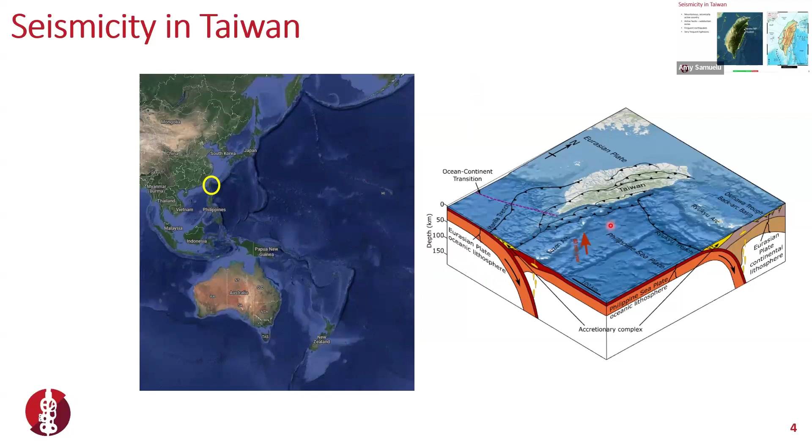It's a reasonably small country, a small island about a third the size of the North Island, with about 23.5 million people living there, mostly in the north and on the western side of the island. As you can see from this satellite image, it's actually a very mountainous country. A third of the island is lower than 1,000 meters elevation, the rest is above, because of that high seismicity and active plate boundary running right up underneath and through the country.

Just for reference, the plate motion is roughly 80 millimeters a year, the convergence, which is approximately double the Alpine Fault and about 30% more than the Hikurangi subduction margin off East Cape. So put that into some context.

So as you'd expect, there are frequent earthquakes, and because of the high uplift and mountainous terrain, and its position right on the tropics - the Tropic of Cancer runs roughly through the middle of the country - there are lots of typhoons too, even more, roughly 4 a year.

So the earthquake that we went to reconnoiter this year occurred just off the city of Hualien on the east coast, and it also affected Taroko National Park just to the north.

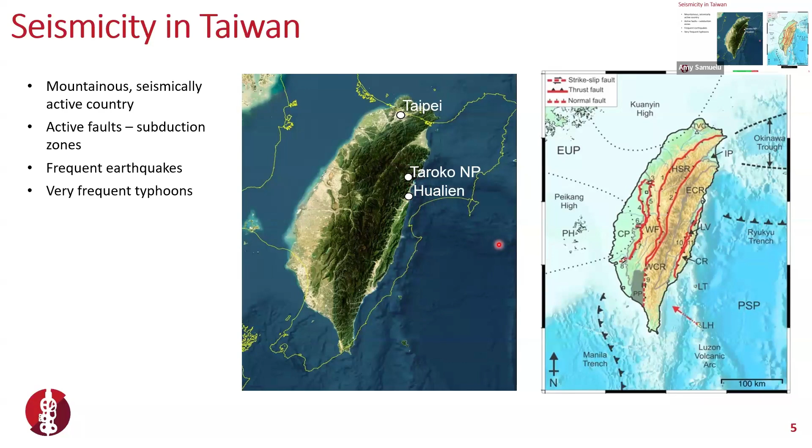There'll be a few themes that come through in this presentation, and one of them is the iterative learning from past events that Taiwan as a country, and all the various departments and organizations, go through. So it's worth mentioning a few significant events that have really shaped the systems and built environment we observed while we were there, and what got them to where they are.

The Chi-Chi earthquake in 1999 was really a watershed moment for things like seismic codes, emergency response, and insurance. Taiwan set up an equivalent to the Natural Hazards Commission in response to the Chi-Chi earthquake, and emergency warning systems and different agencies got established. Because it was such a major event, a lot of buildings got destroyed, with huge casualties and economic losses.

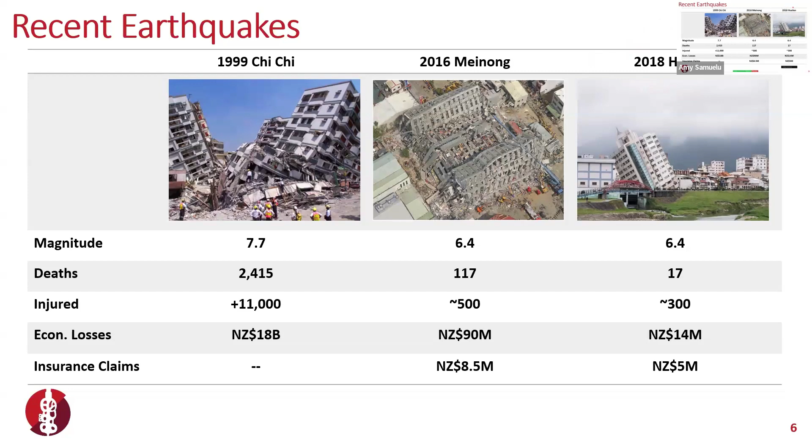Then in 2016, the Meinong earthquake - not as seminal as the Chi-Chi earthquake, but worth mentioning - caused a lot of building damage, and was also the topic of an Earthquake Society mission that Boya led back then. More recently, an earthquake affecting Hualien was useful for our structural engineering team members, because it caused a lot of damage, but also because it was relatively recent, allowing us to compare the damage that occurred then with the damage that occurred this year and see what worked, what didn't, and what the patterns of performance were.

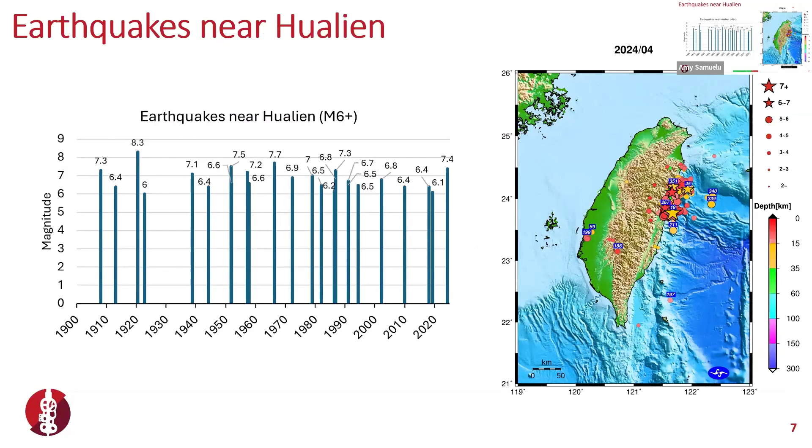This slide really drives home the message that natural hazards and earthquake hazards are a daily fact of life in Hualien. This graph shows the number of large magnitude earthquakes, greater than 6, that have occurred near Hualien - that's 25 earthquakes over magnitude 6 in the last 110 years. So that return period is a lot more frequent than what we've experienced here.

Honing in a bit more on the area, it's quite similar, with a lot of analogues to the west coast of the South Island. You have the central range being uplifted to over 3,000 meters elevation, and then there's a narrow strip along the coast. This is Taipei off to the right, so this is looking southwest, and Hualien is on the east coast here. There's a narrow strip formed from outwash of rivers - gravel from the mountains.

Because of this topography, the infrastructure is constrained. There's only one main infrastructure corridor, with the main road and rail corridors and power networks running north-south along the coast. Then there's the central cross-island highway running through Taroko Gorge, through the national park, and up and over the main range, connecting the east and west coasts.

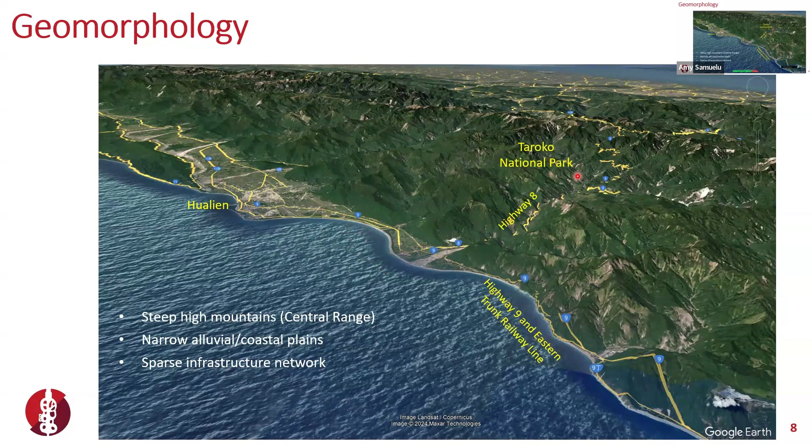A little bit about the geology, as you might expect: the mountains are underlain by hard, strong metamorphic rocks - schist, gneiss, and marble. In fact, the marble along here is quite famous, with a lot of quarries, and it's exported all over the world. Along the coastal strip, it's reasonably dense alluvium with high energy rivers, given all the high mountains and frequent storms - so it's alluvial sands and gravels and beach deposits as you get close to the coast.

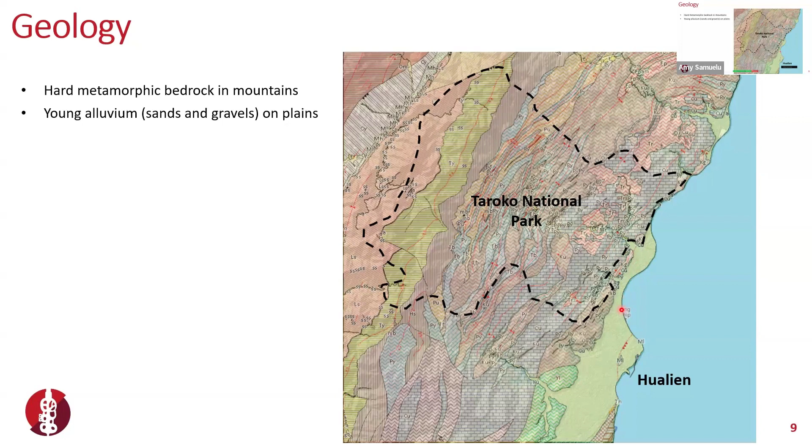In terms of what we actually did, we were based in Hualien for most of the time, and there we carried out inspections. But also quite importantly, we had a series of meetings with local organizations - local government and non-government organizations, building owners, etc. - focusing mostly on the city, but we also took a trip up to the coastal mountains.

We couldn't get into the national park, so a lot of what I'll talk about in terms of damage there is gained from information provided to us and from research afterwards. We also had a bit of time in Taipei, where we had more meetings and workshops with government agencies and institutes, as well as some inspections of buildings that were damaged up there.

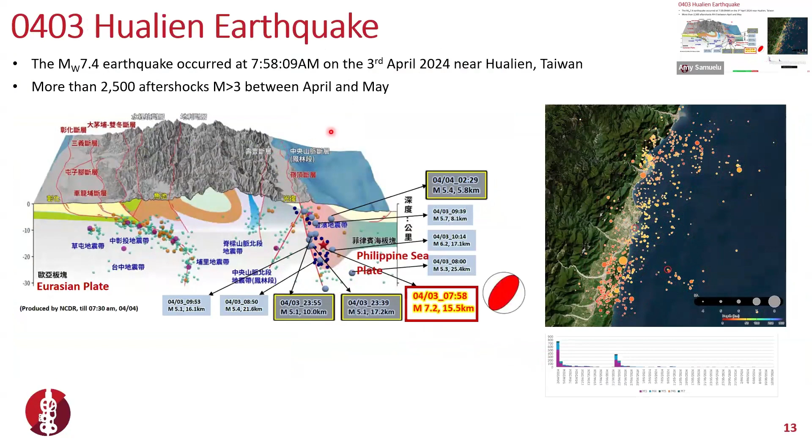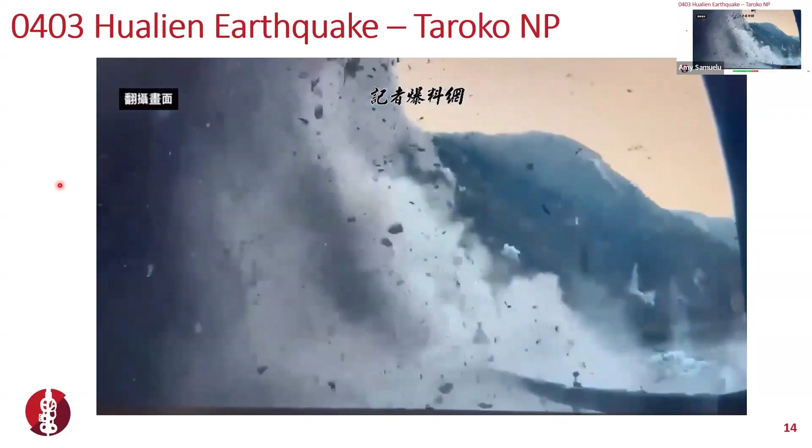So they hear the alert and they stop on the rockfall shelter. Okay, and then you can imagine the rest.

In terms of the ground shaking, there weren't too many instruments actually in the park itself, and you probably can't see those graphs in too much detail, but suffice to say, you can tell from the spectra here that there were very high accelerations at low periods. The PGA up on the main range was about 1.5 G horizontal, and over 0.6 G vertical as well. There's also very high vertical shaking, shown by this blue line here near the coast.

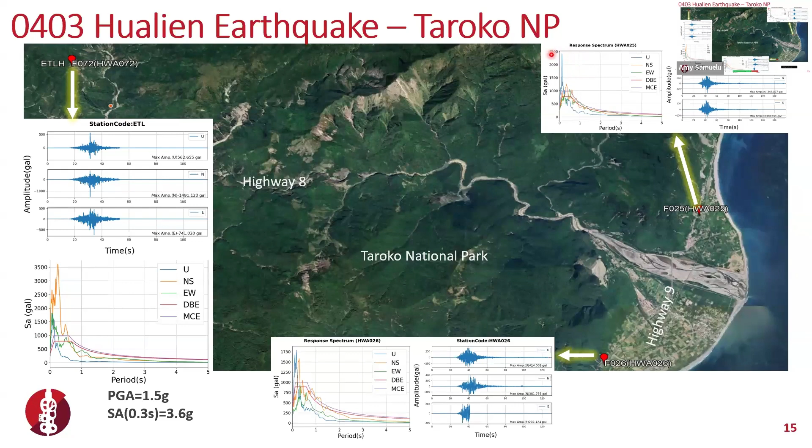And as you might expect, that resulted in a lot of landslides. This just shows the general distribution. A reasonably focused area of landsliding highlights that directivity of the ground motions from the rupture to the southeast, and really concentrated around the coastal part of the main range.

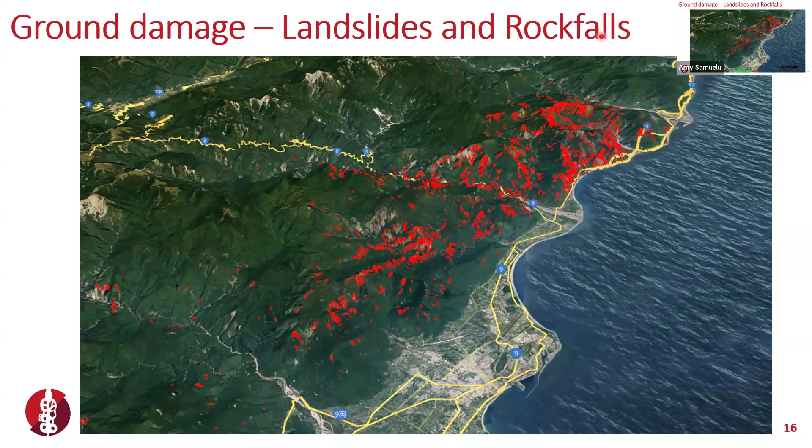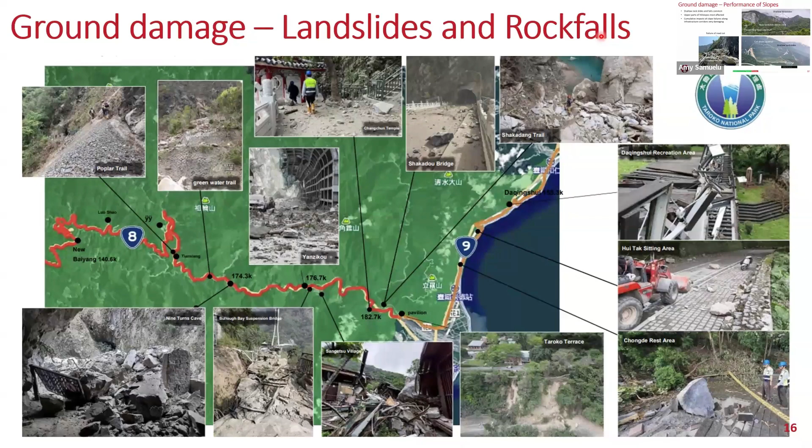In terms of the damage that it caused, well, you just saw that from the video. The landslides all tend to be higher up on the mountains, and then they resulted in rockfall and rock avalanches, so impact damage was the main form of damage. The rock slides and rock falls from the upper parts of the hill slopes tended to be the most common type of ground damage - maybe not so large individually, but because of the number of them and the cumulative effect of lots of them occurring along a narrow corridor, the impacts were quite significant.

So just a bit of context about slope hazards in Taiwan and how those are managed. As I mentioned before, Taiwan has 4 typhoons a year on average, and because of the mountainous terrain and the communities that live in the mountains, hazard management is a really critical part of life. So the underlying principle here is that we can't stop landslides and debris flows from happening. We need to mitigate the risks, manage the land use, and provide alerts and warnings to people who are already in those affected areas or potentially affected areas.

The Agency of Rural Development and Soil and Water Conservation is responsible for managing the early warning system. They've mapped out all the debris flow catchments, and the Central Weather Administration provides weather forecasts to the Soil and Water Conservation Agency. If it's over a certain threshold, they issue alerts to the local government, the equivalent of the council, who are then responsible for evacuations and providing shelter.

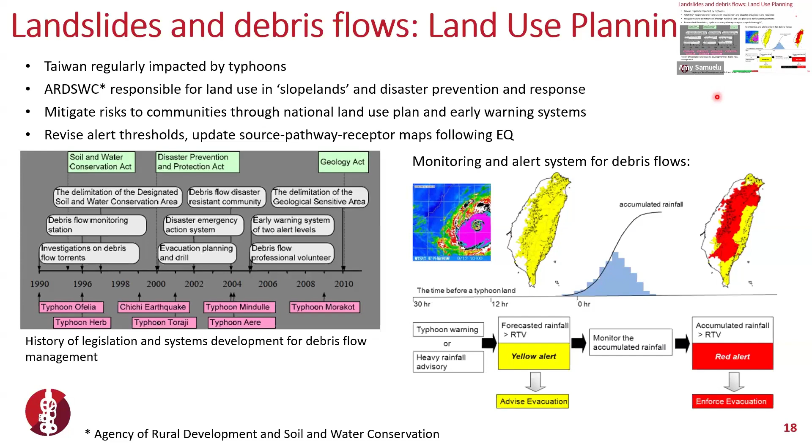After the earthquake, all of these got remapped and reassessed, and new sources of debris flows or landslides were picked up, as well as the receptors, and these got added to the system. So for buildings within a potential debris flow path, they would be on the register, and when alerts were triggered, the county government would be responsible for ensuring evacuations if need be. This was tested several times, as there were a number of storms, and particularly a super typhoon, since the earthquake.

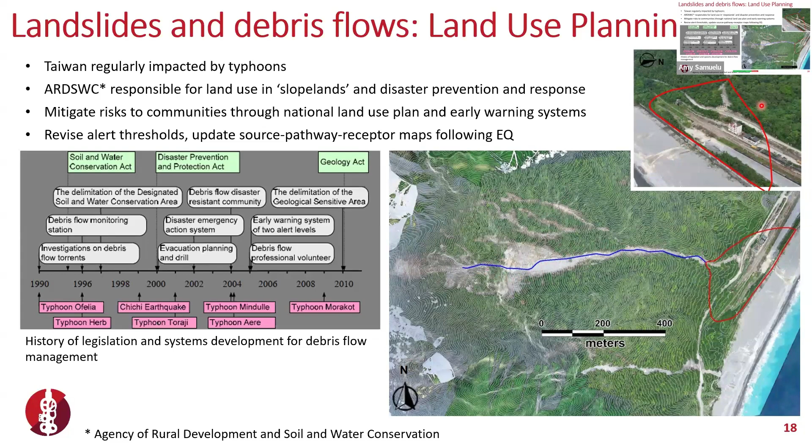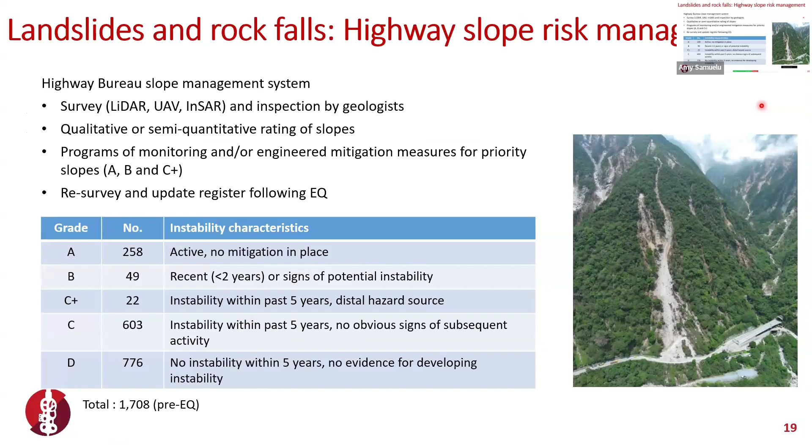Similar story for the highways. The Highway Bureau manages a slope management system very similar to what Waka Kotahi NZTA does here, by rating slopes and then having a management plan for monitoring and mitigation depending on the level of hazard. Similarly, possibly more advanced than the system we have here, this gets updated and access gets controlled depending on the rainfall forecast.

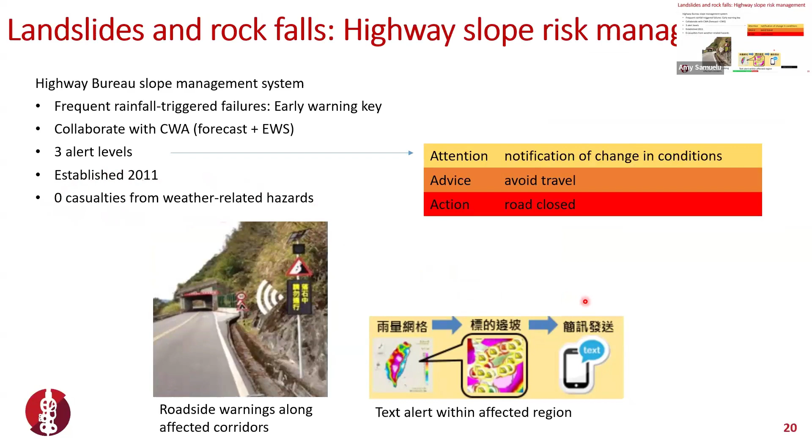That gets done both by roadside warnings to warn if sections of corridor have been closed, as well as text alerts to your phone. The Highway Bureau pointed out very proudly, and rightly so, that since they implemented the system, they've had no casualties from typhoons and weather-related hazards.

This is a very wordy slide, I won't go through it too much. Just two key impressions we were left with having been to Taiwan: one around technology and the different agencies, and one was a constant seeking to learn and improve from past events, using technology to do the improvement part.

An example was the video showing the car stopping in the rockfall shelter and being protected - that was a recurring theme across the gorge. There were 600 or 700 people stranded in the gorge, many sheltering in the tunnels and shelters. So the Highway Bureau is looking to add warning systems to the tunnels themselves so people don't have to rely on their phones to know when an earthquake's happening to stop in the tunnel.

The second point is not so much the technology itself, but the interconnectedness between the different agencies. It's no use one agency having a great advanced system if their role is to provide that information to another agency and they're not doing it. The Highway Bureau provided information about the numbers of people stranded on the highway to the fire agency, who are responsible for search and rescue.

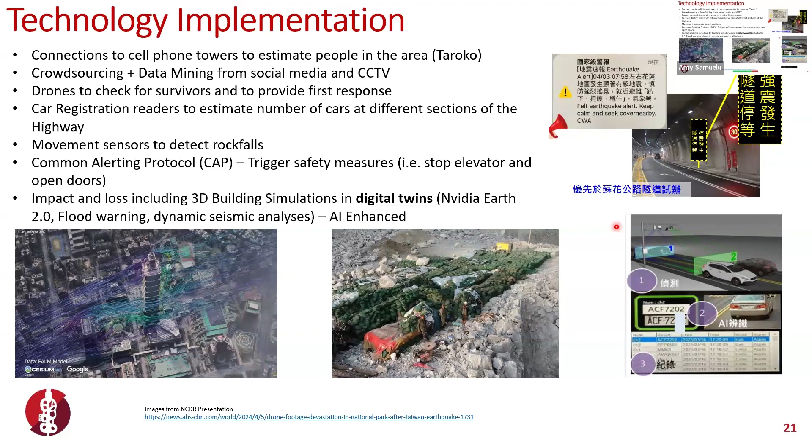Now the Highway Bureau is looking to enhance their vehicle detection technology with sensors similar to speed cameras, as well as using the cars' own speed control sensors to pick up how many cars might be on the highway at any one point, to give better estimates of the numbers of people who might be affected, faster. That's really the key theme that keeps coming across: speed of response, and how we can use technology to facilitate that.

Moving now to the city in terms of what happened, there wasn't really much ground damage to speak of. The whole port area itself was uplifted about just under 0.5 meter, so you can see here the old tide line. This has created a problem now with the whale watching boats being too low to safely get into - you can see a couple of guys cutting down to create a step so people can get onto the boats.

There was some uplift, up-thrust of flotation alongside a wharf structure, and a bit of liquefaction in the port as well. But other than that, these two photos here, in terms of damage within the city, really sum it up. There was a little bit of cracking, a little bit of movement - I had to highlight here cracking to a retaining wall, and that was really about it.

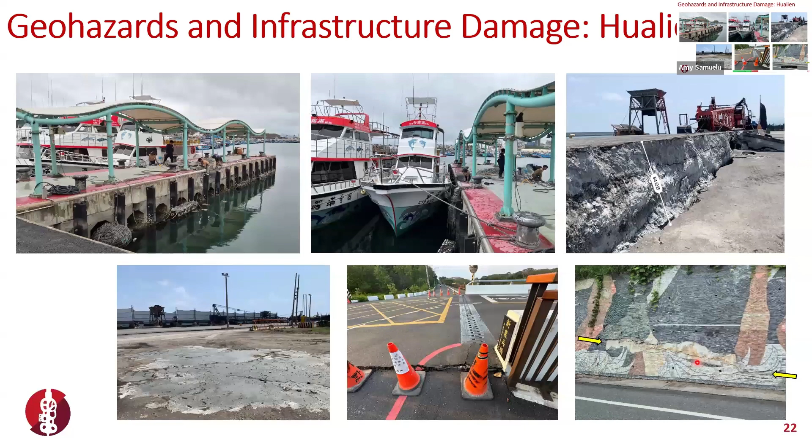I think Alice will go into a bit about the ground motions in the city. They're a lot lower than in the mountains, but the dense gravel, deep, some Pleistocene cemented gravels as well, really limited the soil amplification, I think.

In terms of damage to infrastructure, I won't go through the numbers, but you can see here the reduction in power outages and how quickly they got things turned back on, which shows that the number of outages were really a reflection of the safety systems' cutouts cutting in, rather than actual physical damage.

This photo on the right shows a burst water main. You can see some buckling deformation to the bridge, and that's just caused some associated damage to the pipe, as you might expect.

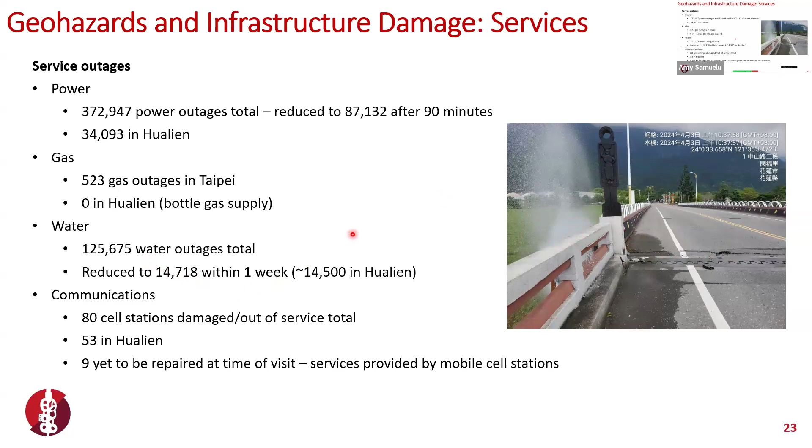The main damage to infrastructure was to the roads and the railway, as you might expect, because those pass through the mountains. This is an example of a similar setting to what we have a lot of in New Zealand, in the South Island particular.

A road at the bottom of steep, high hill slopes got taken out by debris from the earthquake. But within three days, a temporary bridge was able to be put back in. You can't quite see it here, but the old bridge, they just left in place — they didn't remove it when the new bridge was constructed. So they were able to strengthen and widen it and use it for light vehicles straight away.

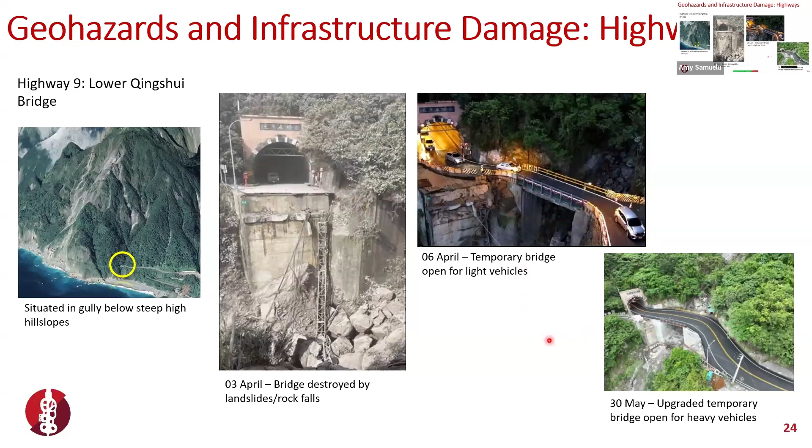Then a couple of months later, a new temporary bridge for heavy vehicles was put in. We visited the site at the end of May, and they're already putting in foundations for a new permanent bridge. Pragmatism and speed of response are more themes coming through.

Here you might be able to see railway irons being pushed through the base of the footing here that's constructing, just to provide a bit of shear resistance. The number of anchors — these are light, quick, self-drilling anchors, hollow bars — just to reinforce the temporary cut.

You can see the hazard, the precarious nature of the site they're working in by the angle that the digger is sitting at. The speed here was to get this built, get the foundations poured and up out of the gully before the wet season arrived. And this gully was turned into a river of mud and rocks.

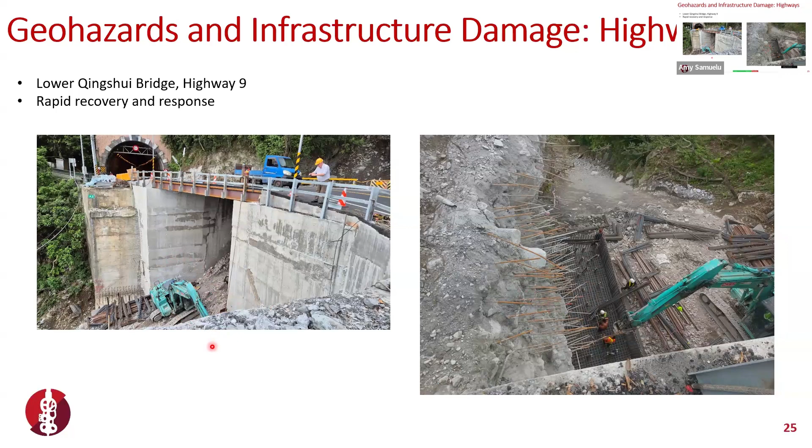So to put that river of mud and rocks into a bit of a visual context, this is before the earthquake, and this is after the earthquake and after the typhoons as well. So you can see all of that damage making its way down onto the road, the rail, and the coastal and inland communities as well.

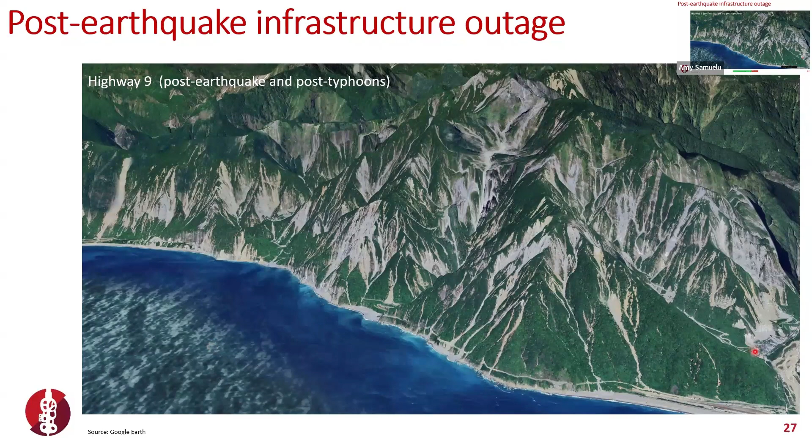So really that sums up the observations for infrastructure. There wasn't a huge amount to write home about in the city, but there was a lot of damage in the mountains. The quick response to get limited access was effective, but dealing with these typhoons and constant setbacks and debris flows is going to take a lot longer for the highways to recover.

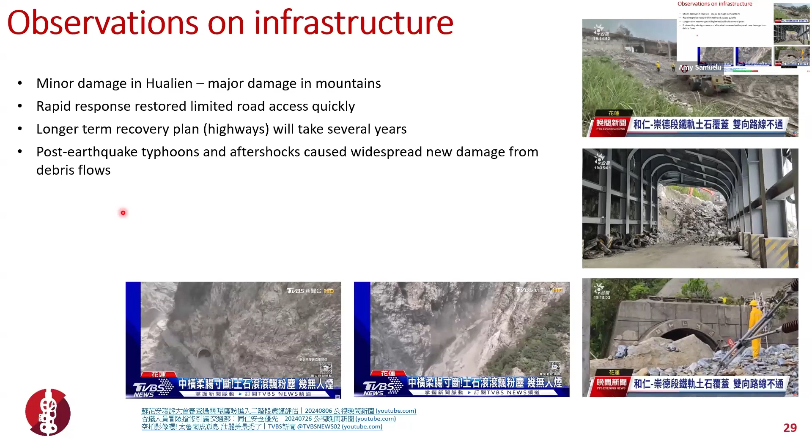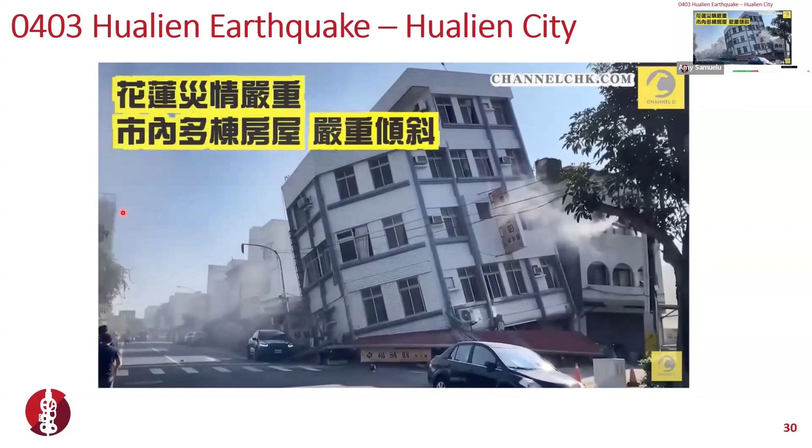So this footage is going to give you a visual context about what really happens within Hualien City, and the shaking period. Across Hualien there's about 28 buildings partially collapsed or totally collapsed, and this is one of them.

You might have seen this footage on TV1 News.

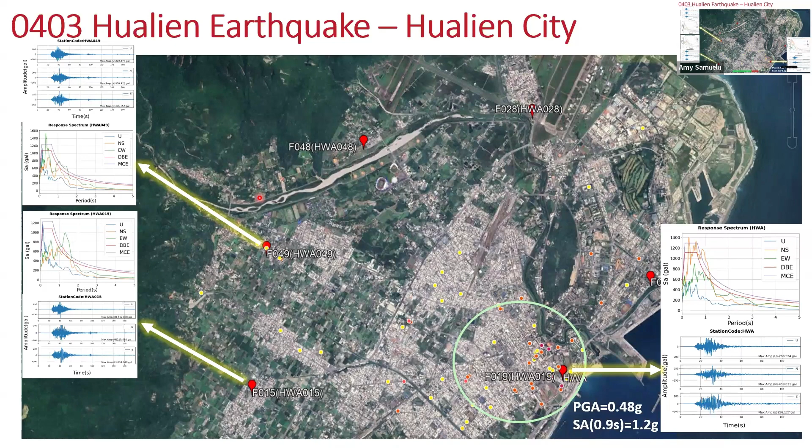But before we go into a little more detailed assessment of the building damage, I would like to give you an overview about the building stock, the characteristics and features of the buildings in Taiwan.

Across Taiwan, there are about 8.5 million buildings, but 75% of them are predominantly in-situ reinforced concrete, moment-resisting frame buildings with either masonry infills or some lightly reinforced infills. So they are very heavy buildings. Plus, during the 1990s, Taiwan experienced a construction boom.

Doug mentioned 1999 was the Chi-Chi earthquake, so a lot of buildings were built before that - we call them pre-Chi buildings. There were about 3 to 4 typhoons each year affecting Taiwan, and therefore the features of those buildings have very strong facades, which creates a big mass - meaning the design of the strong facade and concrete infills creates very heavy buildings.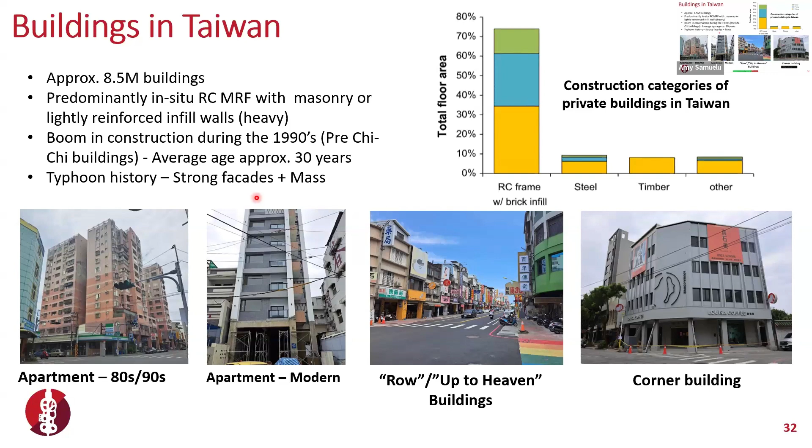For residential apartment buildings, often according to their architectural requirements, they have an open space on the ground floor, which creates a soft story or weak story. That is a very typical deficiency we have seen in those buildings.

And again, you may see those infill concrete walls from this building. So the common presence of masonry infill for internal partitions, but also we have seen a very strong presence of lightly reinforced concrete walls for external partitions. In the shear damage of those walls, you can see it in this building.

And a lot of debris - a large amount of debris - were around those buildings from the falling tiles and also glazing, the broken windows, the glasses. That presented a big hazard for the public around those buildings.

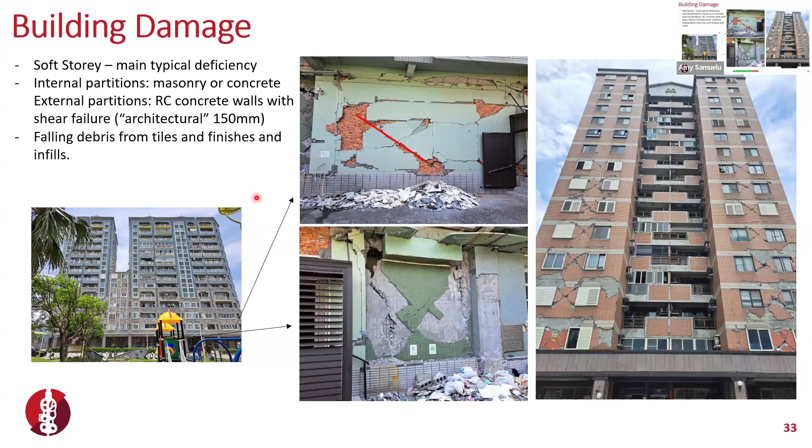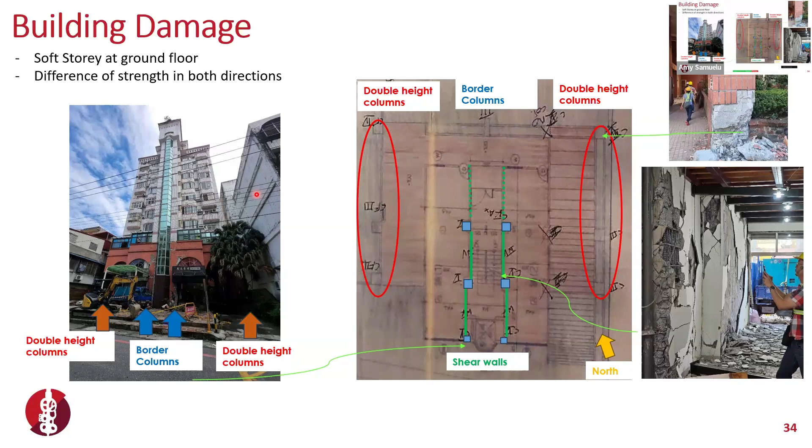Another typology of building I mentioned was the row buildings and corner buildings, which often present either vertical irregularities or plan irregularities. On the left side, you can see the McDonald's building - for this building, the damage was caused by the plan irregularity. The bar buckling was due to large spacing of stirrups, which, because of the plan irregularity, also caused a torsional effect on the building.

On the right side is a Louisa Cafe. This building is very similar - it's got plan irregularity that created a high demand on those columns. We also observed very poor detailing of the stirrups in the plastic hinging zones, which can cause all this damage.

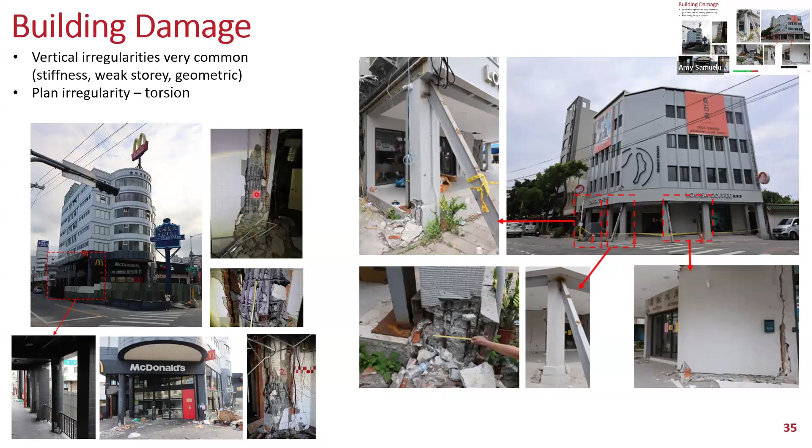I won't go through this in detail because I really want to show some of the resilience lessons we have learned rather than just showing the damage, since we have seen a lot of this. This slide shows you some of the pre-Chi-Chi earthquake older buildings damaged due to poor detailing as a result of poor construction monitoring and quality control.

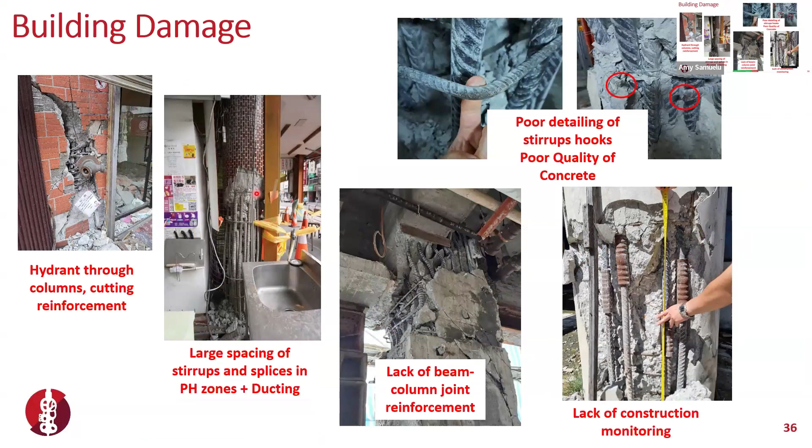We also observed the damage to non-structural components. This is very interesting because when we actually observed the non-structural component damage, we picked our top 5 non-structural components that really suffered damage and perhaps led to the uninhabitability of that building. This corresponds to how the local engineers decide to give a yellow tag or red tag to that building.

Failure of those non-structural components was the major cause of loss of functionality of those buildings, especially in the yellow-tagged buildings. When we look at their damage assessment criteria, why they gave a red tag was pretty much to do with the structural components, like the structural beams, columns, and foundation. Whereas for the yellow tagged buildings, it's to do with non-structural damage, leading to the uninhabitability of those buildings.

I just want to emphasize for the yellow buildings, you're not supposed to use those buildings, or it poses some public life safety hazard. But those buildings are structurally intact, they just cannot be used or reoccupied.

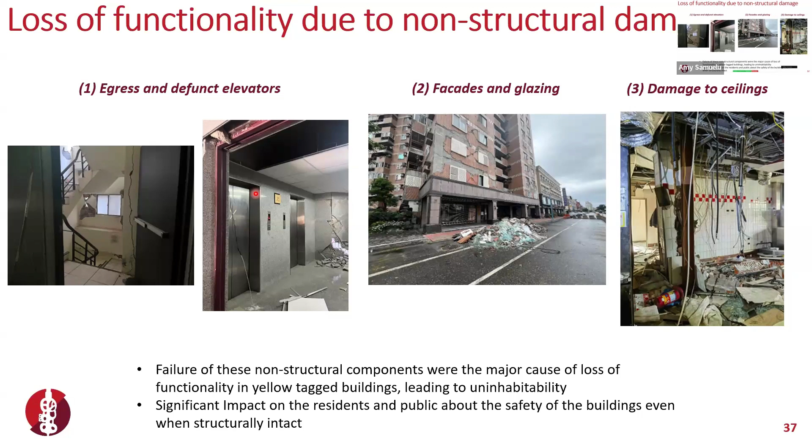So the public themselves actually saw this imaging from their own building, and said it had caused a huge life safety concern.

Tzu Chi Hospital is really worth mentioning when it comes to functionality. On this hospital site, we have several medium-rise buildings with different structural systems. You can see we have an RC building, in the middle is actually the BRB, and on the right is the base isolated building.

For the base isolated building, it holds emergency and critical facilities, and also proved to have the highest level of resilience, which is no surprise, isn't it?

For both the RC and BRB buildings, the drifts and accelerations were quite high, and that caused some damage to ceilings, partitions, plus some services. Whereas for the base isolated building, only very minor damage was observed, pretty much to water pipes and other services. And those minor damages didn't impair any emergency response.

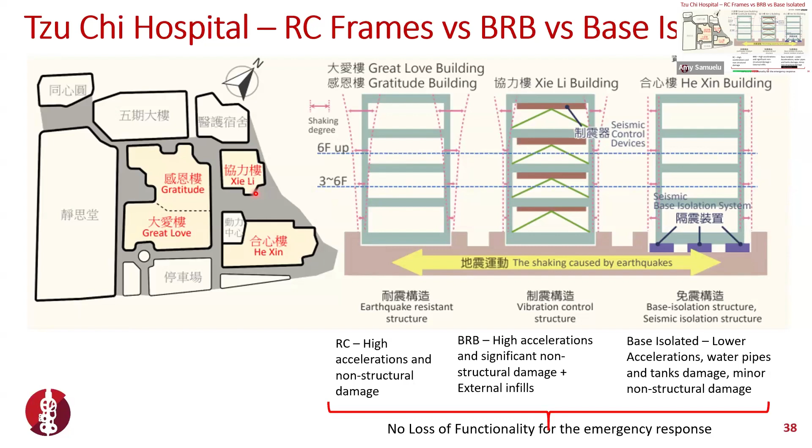Across the hospital systems, about 700 items, mainly non-structural components, were repaired. But the hospital itself was able to continue operations with very minimum disruptions.

We want to highlight some resilience practice we observed. Just to give you an example, on the left-hand side is a computer room. The local facility manager mentioned to us that they got a quote to fix this computer room, and it was going to cost about $10 million.

So their solution, rather than just strengthening and fixing it, was to change the location of the computer room to a lower level. The repair to the computer room then only cost about $10,000. So it's more about a pragmatic way of thinking about resilience.

The second example is this laboratory fire. This is interesting because in the laboratory you're not supposed to use water due to the chemical reactions, so there's a certain rule within that lab, but they still put a fire sprinkler there. The benefit of doing that was, during the earthquake there was a fire in the lab, but the sprinkler worked, and the fire was quickly controlled without spreading.

There's another extreme case in Donghua University, which is also located in Hualien. In their laboratory there was a big fire, and they didn't have any fire sprinkler system, so the fire spread out and caused quite significant damage to the campus.

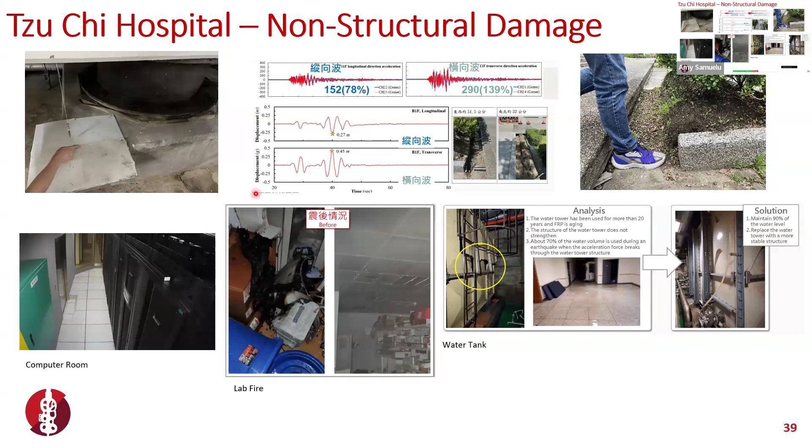Thank you, Alice. My name is Julian Benito, I'm a structural engineer with WSP. I'm going to be talking about retrofitting and retrofitted buildings and their performance in the earthquake, and then I'll follow up with emergency management and emergency response during the event.

In terms of retrofitting, we first need to discuss the history that has led Taiwan to this day. The Chi-Chi earthquake in 1999 was a watershed event, and after that, a lot of changes happened within the building code and community. The building code since Chi-Chi, equivalent to our 1170.5, has been updated several times - in 2005, 2011, and even recently in 2022 - including directivity effects and basin effects. It's pretty similar to New Zealand, where over the last 20 years our codes have progressed quite significantly too.

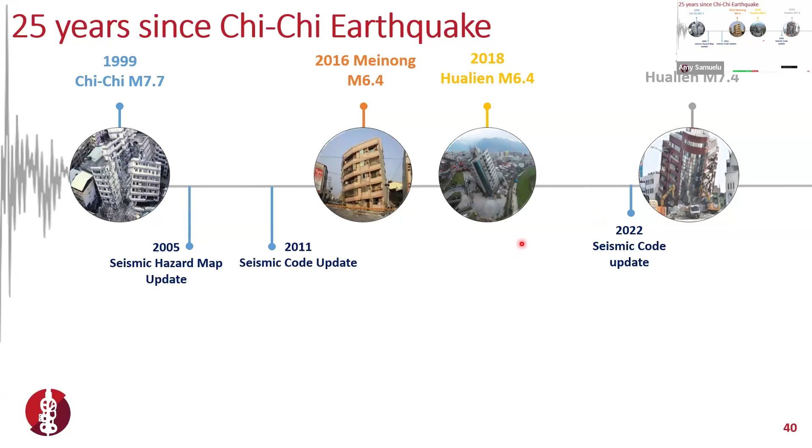During the Chi-Chi earthquake, 700 school buildings collapsed. Luckily that was in the middle of the night, so no kids were in those buildings, but it triggered a very aggressive retrofit program from the government focused on school buildings. Since 1999 until two years ago, there was a first phase of strengthening buildings focused on school buildings and public buildings, and the numbers are quite impressive.

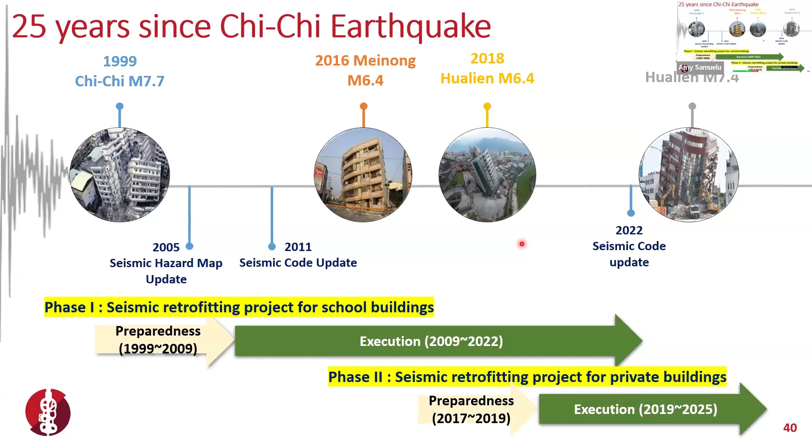Recently, after the 2018 earthquake and even before, a second phase began focusing on retrofitting private buildings. Phase 2 is non-compulsory, unlike what we have here in New Zealand, but it's gaining traction, and you'll see the results that happened in the Hualien earthquake.

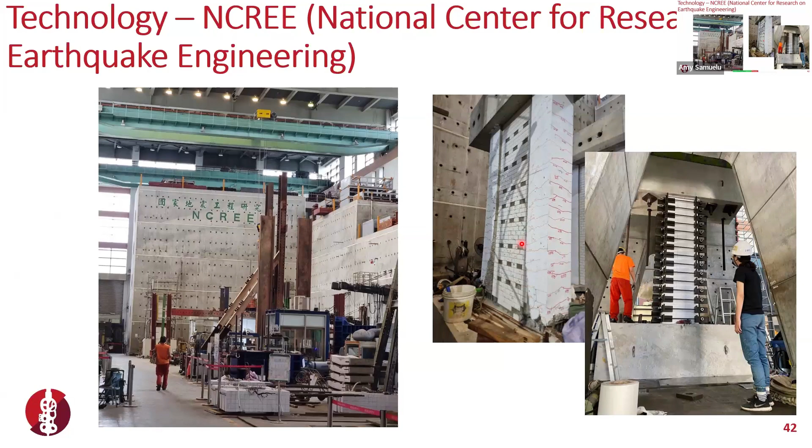We need to mention one government entity called NCREE, the National Center for Research on Earthquake Engineering. This center has a lot of engineers and produces a lot of research output, providing research into how to strengthen school buildings and the general building stock. This organization was crucial to developing techniques and making strengthening affordable.

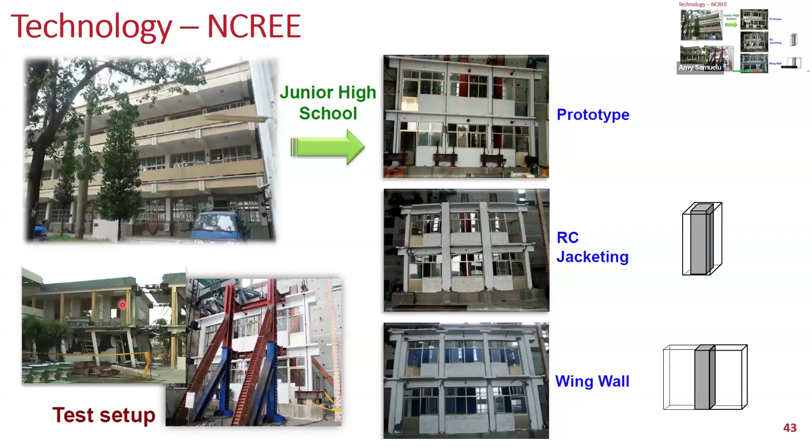NCREE has been developing, with the school program, a series of tests and prototypes, testing strengthening techniques like jacketing of columns or adding wing walls. Everything was tested, even with prototypes, just to see how well they could predict the response of the existing building and how well the strengthening worked. Some schools that were going to be demolished even had a live pushover test done, just to see how well they could predict their behavior. So research has been at the back of all the developments we're going to see for the retrofit of buildings.

The execution of the retrofitting of school buildings has been in place for 13 years and is, I believe, 99.9% complete. They spent about 6.4 billion, and more than 1,000 engineers participated. The target of strengthening was about 100%. In total, 10,000 buildings have been strengthened as part of this program, about 37% of the stock - this is after a first screening process, like the ISA that we have, but it's a little different there.

Out of the total number of buildings, they decided that only 10,000 needed strengthening, and they have completed that. It's very impressive. The really impressive number is that the retrofitting cost is about 10% of the replacement cost. That's very, very impressive.

The way they do that is they focus more or less on the superstructure. They don't do much work on the foundations or the floor, as we will see with the other buildings. So they're trying to keep it affordable and practical.

They do promote, at least for schools, the use of traditional retrofitting techniques, like reinforced concrete jacketing, reinforced concrete wing walls, or reinforced concrete shear walls. And they prohibit the use of more sophisticated devices or techniques.

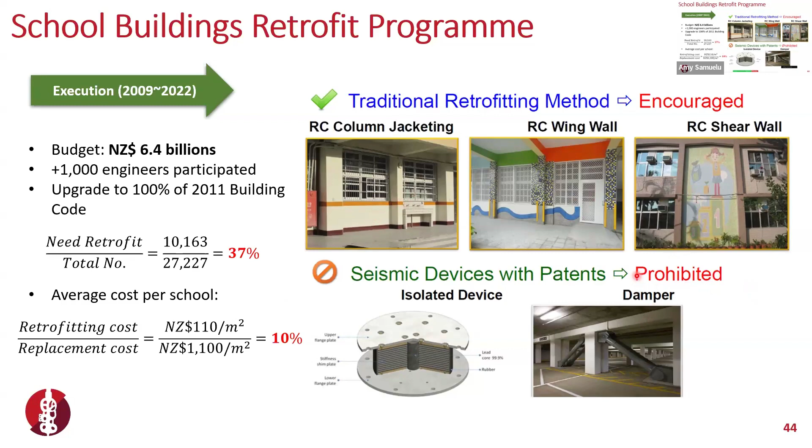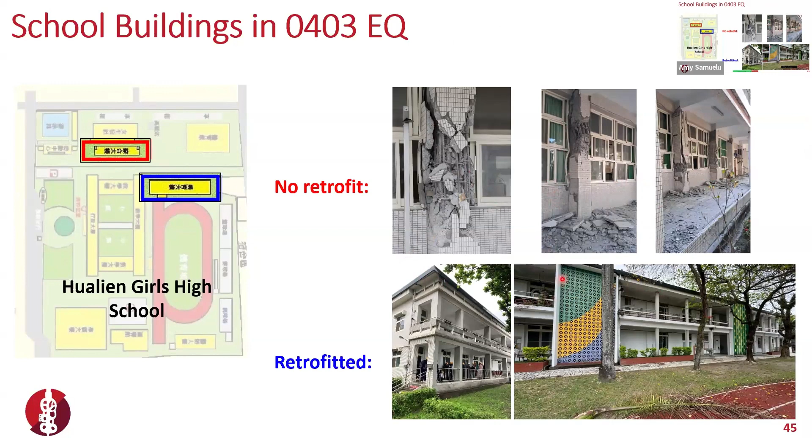Now we're going to move to the private building program that they have in place. This has been in place since 2017, and it's non-compulsory, as I mentioned. But again, it began with research on how we can improve our building stock, what our main deficiencies are, and how we can address it.

The whole retrofit program has been divided into two plans. The first is to address the soft story deficiency. You've seen in the videos and in previous earthquakes that most buildings collapsed due to a soft story, so the first and foremost priority is to repair that deficiency. Plan B would be, on top of the soft story deficiency, to strengthen the whole building up to 80% NBS equivalent.

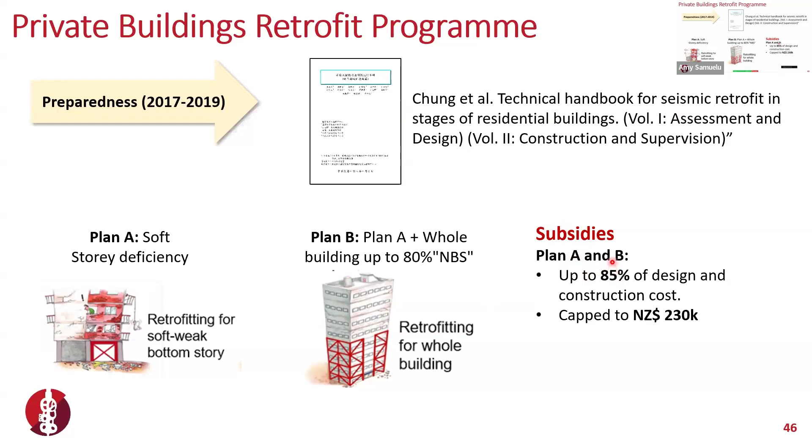For this, what was really interesting to us was that there are subsidies available for retrofitting buildings, up to 85% of the engineering and construction cost, capped at 230,000 New Zealand dollars equivalent. That might not seem like much, but it's a lot in Taiwan, and we've seen that many people apply for the subsidy, making retrofit possible.

As I was mentioning, the first focus is Plan A, the weak story retrofit. Not only in Chichi, but all pre-Chichi buildings have this soft story deficiency and need to address it. These are the killers. So first and foremost, this is the worst deficiency. Let's address it and focus on that first, because we know these are the most damaging buildings for society.

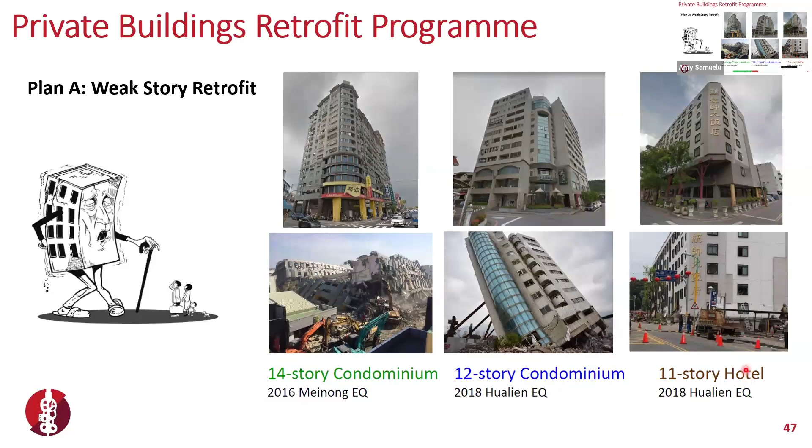This private building retrofit program started a couple of years ago, and they aim to strengthen 30 buildings per year or so. The budget for the subsidies is about $7.5 million New Zealand dollars per year. So far, there are 22 cases completed, 80 approved, and 100 on the way.

So we visited some of these buildings while we were there. We were taken by NCREE, and one of the examples they showed was this one. This building suffered some minor damage during the 2018 earthquake in Hualien, and after that they decided to apply to the subsidy and retrofit it. They added a couple of shear walls, as you can see at the ground floor in the car park. This time, during this earthquake, it suffered almost no damage. So it proved that a simple retrofit like this was very effective in addressing that soft story.

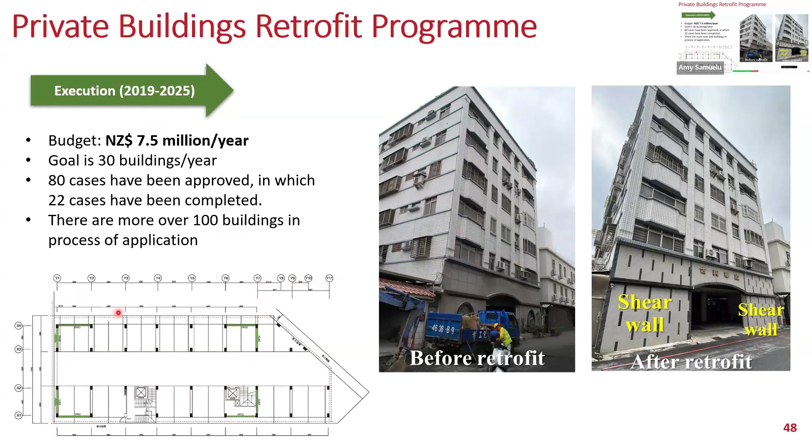This is another example of a building that was damaged in 2018, then strengthened, and suffered no damage in 2024. You can see here that they added some shear walls and did some work on the columns to increase strength over height, and the shear walls were just to address the soft story.

But the main message here is, and the Taiwanese did say over and over, is that they want to be affordable, efficient, and pragmatic about it. And that's why in this case, for example, they didn't use piles in the foundations. They just built shallow foundations for the new walls, or even for the wing walls. And that kept the cost really, really low.

In this case, we see that the average cost of strengthening was $175 per square meter, which is quite low and quite impressive. This had access to a subsidy, and if you apply to the subsidy, it has to be peer reviewed by NCREE, by the way, and usually after the peer review they'll require you to be monitored. This building is instrumented and monitored, and there's an app you can access to see how your building performs.

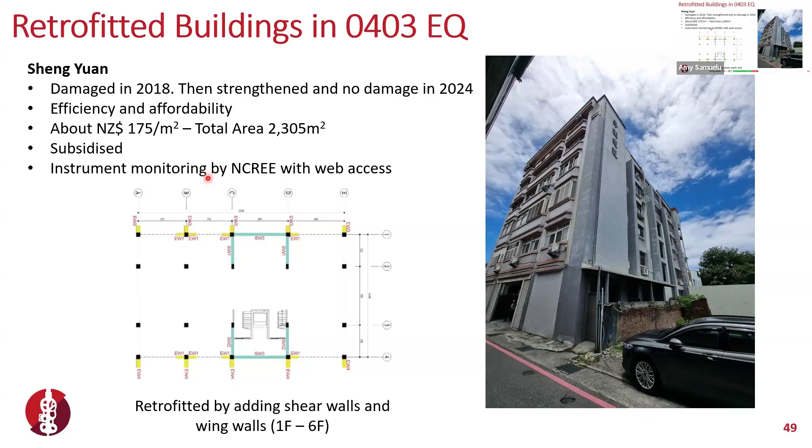The last one of the examples we saw that have been strengthened is the Les Champs Hotel. This one is quite interesting because it did suffer damage in 2018 and then was strengthened using BRBs, as you see in the photos, with no damage or minor damage in this earthquake, only a little bit of pounding because it's two separate buildings.

I don't know if you can see on the plan, one building here and the other one here, and you can see in this elevation here and here. The strengthening was very simple: column jacketings to repair the damage from the previous earthquake, and to provide additional strength for the base that had BRBs in each direction. Minimum foundation work, shallow foundations, and minimum diaphragm work. That keeps the costs really low.

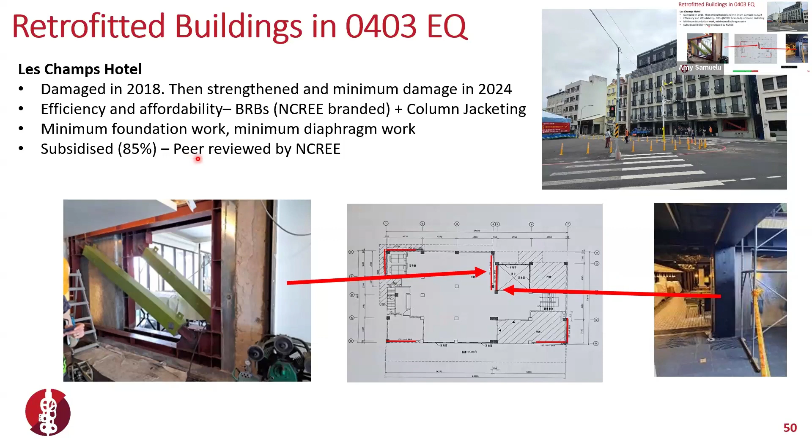Again, it was subsidized at 85% and peer reviewed by NCREE. It has to be peer reviewed. That's important to note, that all these strengthening schemes get a group of independent professionals to review them. So if there is an image about this earthquake, it's this one, and a lesson.

As you can see in the video, this shows the collapse of the corner building here. It's called the Uranus building, and you saw it in the other video we played. At the back, we have the Les Champs hotel that I just showed you. Both buildings were damaged in 2018.

However, the owners of the Uranus building just decided to repair their building, while the owner of the hotel chose to repair and strengthen, and the results can be seen. We were surprised how well the strengthened buildings performed and how minimal the damage was. So the message here is that strengthening performs much better than we think, and perhaps we should take a pragmatic approach when we do that.

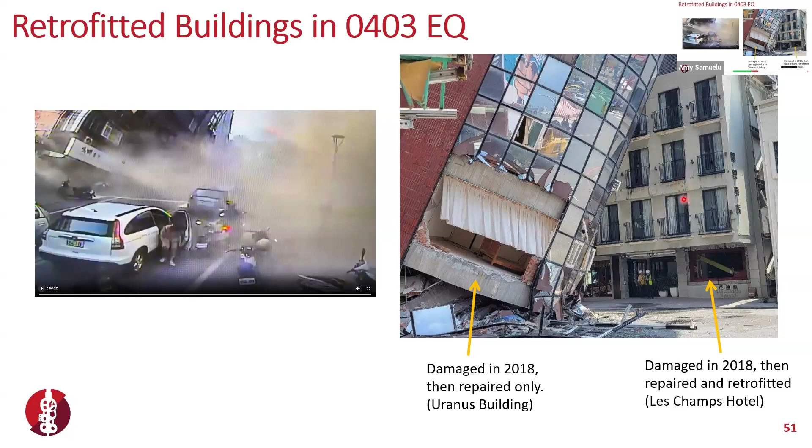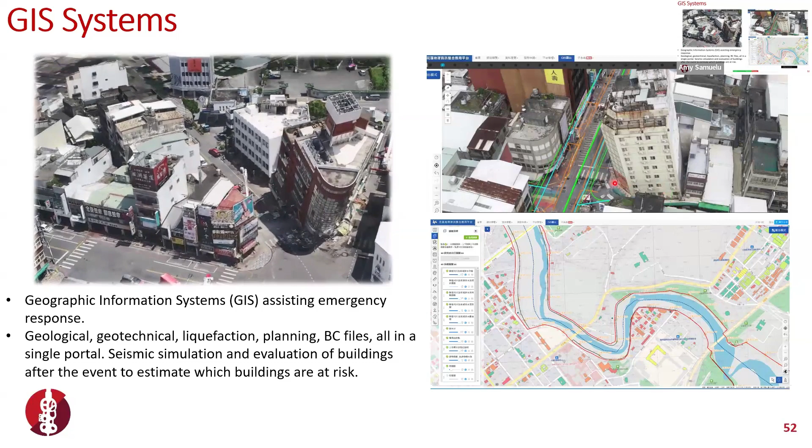Now I'm going to jump into the emergency response and some things we were very impressed about, like the use of GIS, Geographic Information Systems, that assisted the council in the recovery. This is the Hualien City Council page on GIS. After the earthquake, they went around with a drone and collected point cloud data, so they knew how the buildings were and how the ones that collapsed looked, and how they could use that information to plan the recovery.

In this case, for example, this is one of the buildings that collapsed, but they were analyzing with the GIS what's the distance to the nearest building, how much the cordon area has to be, what services would be lost if it collapses, etc. We were really impressed that so quickly after the earthquake, they had all this in place and were using that information to respond.

The other thing that impressed us is that all the information we gather here in New Zealand from different websites was in a single portal over there: building consent information, whether the building was rectangular or not, geology, even borehole information, liquefaction areas, you name it, everything. They are very democratic about information, sharing it, and their systems are quite well integrated and cooperate very well. I think that's something to learn about.

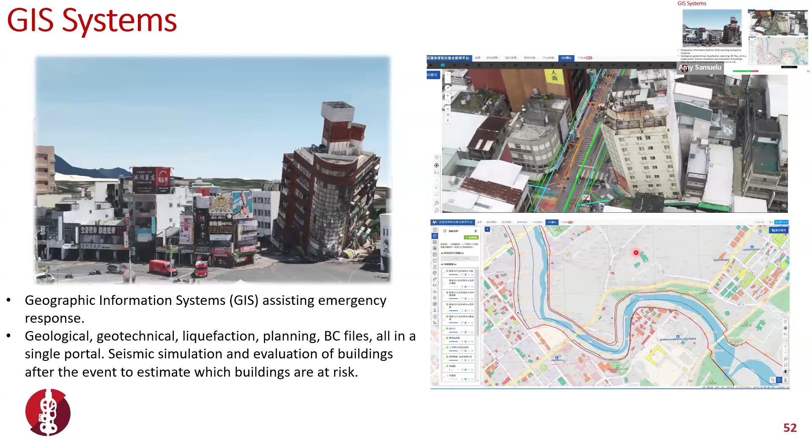Now, the next slide, I want you to pay attention because it's the early warning system that Doug mentioned before. I want you to see the video that will appear and how fast the early warning system is triggered. So this is the earthquake. In the earthquake, shaking is detected.

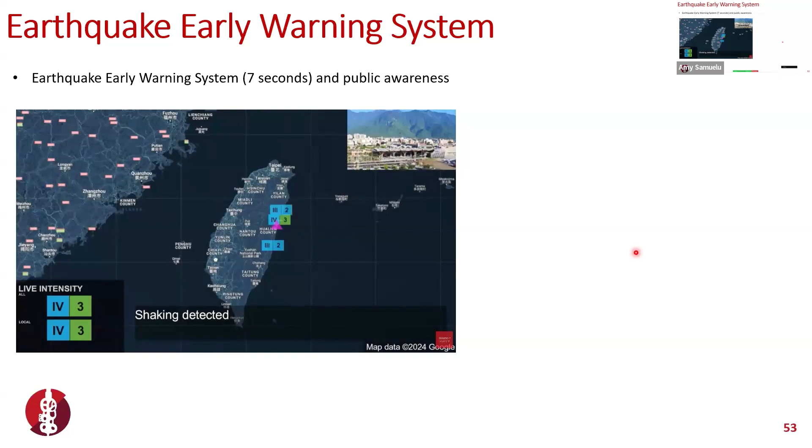Boom, you receive an SMS message that an earthquake is happening. Usually it takes 7 seconds, and we were really impressed.

We had early warning systems for every aftershock while we were there. There was a peculiar one at midnight every day, and we were quite impressed by this.

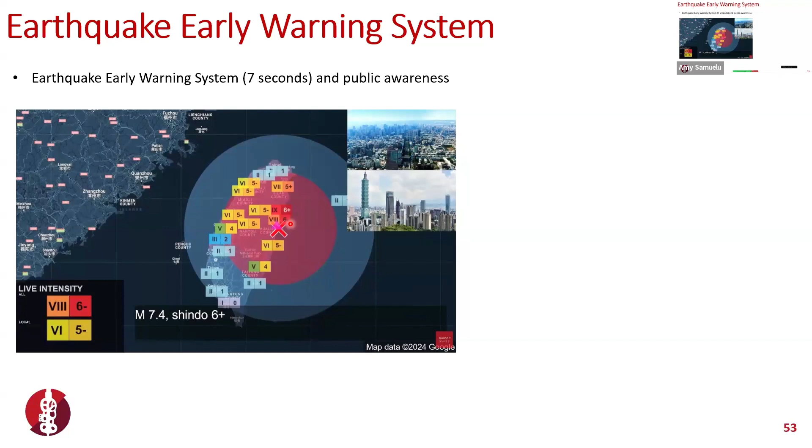Usually they detect the P waves, and with the P waves they can see where the epicenter is located and what the magnitude is. With that, they can see what the intensities will be across the country and issue warnings accordingly as they measure that. So that was quite interesting to see.

This is the level of shaking across the country, and this is how the system was triggered on the day of the event. You see that it was triggered mostly in Hualien and the central area, but not in Taipei, which is at the north. And there was a lot of damage in Taipei as well.

People complained because their cell phones didn't go off even though there was a big earthquake. So after that, they revised the thresholds, changing them to be activated for large magnitude earthquakes of about 6.5. So it's a system that keeps evolving and keeps learning, and keeps improving.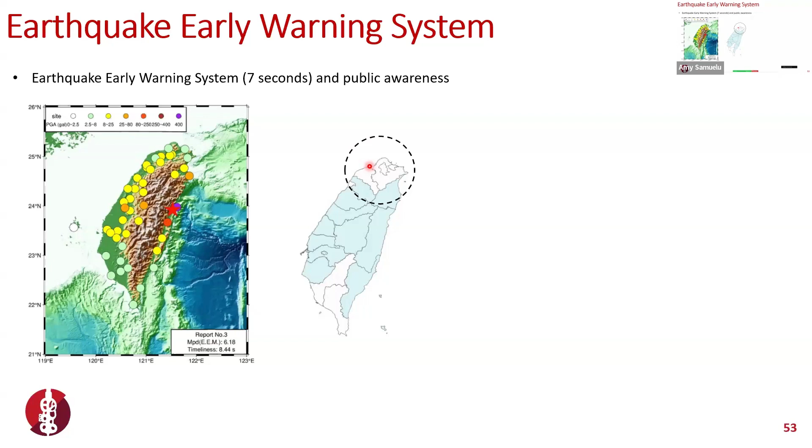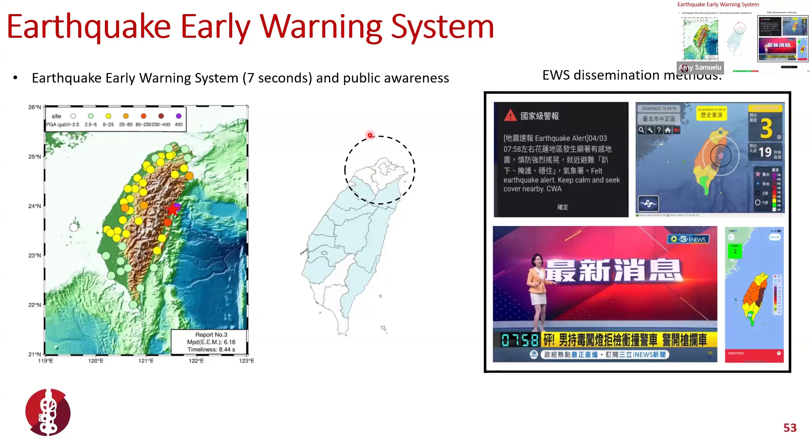Usually the early warning system, besides getting your text message and the sound alarm on your phone, if you're watching TV, the transmission will be interrupted and they will say there's an earthquake, drop, cover, hold. Or if you have the app from CWA, they will send you an alert to the phone as well. So we were really impressed by the use of technology while we were there.

One of the main things we were impressed about in emergency management was a particular institute from government called NCDR, the National Science and Technology Center for Disaster Reduction. They are a science-based institution, and they put together basically all the other agencies and coordinate them so they can have a technology-based emergency response with information and the backup of science.

Most of the people there are scientists or engineers, and even in government, ministers are engineers or scientists, and they use technology to make informed decisions about how to mitigate the impacts of earthquakes. It's so impressive that all the agencies that provide information for the emergency response sit under the same building in Taipei.

And they work collaboratively the whole year. Then when there is an event, they just take the elevator and go to the emergency operations center on one of the floors. We were impressed by the level of integration they had.

When we visited, people came to the room where we were because they were all in the same building. We were standing in the room, and people would come from different agencies and explain what they did.

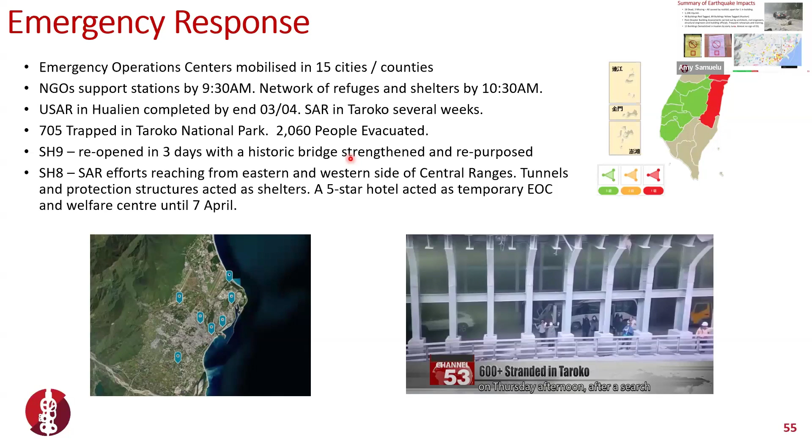In terms of the impacts, unfortunately 18 people died from the effects of the earthquake, and 3 people are still missing. Most of the deaths were caused by rockfalls. Only 1 person died due to building damage, which is quite impressive. And that person died because she went back to her apartment to grab something, and something fell onto her. So it's not even from the collapse, it's from indirect damage.

The assessments are carried out by architects, civil engineers, structural engineers, a mix of different professionals. But they do frequent rehearsals and training. I believe they have mandatory training every year if you want to be in the group that does these assessments. We were surprised how quickly they were recovering and demolishing buildings and clearing the sites with damaged buildings. By the time we were there, already 13 of them were removed and out of sight.

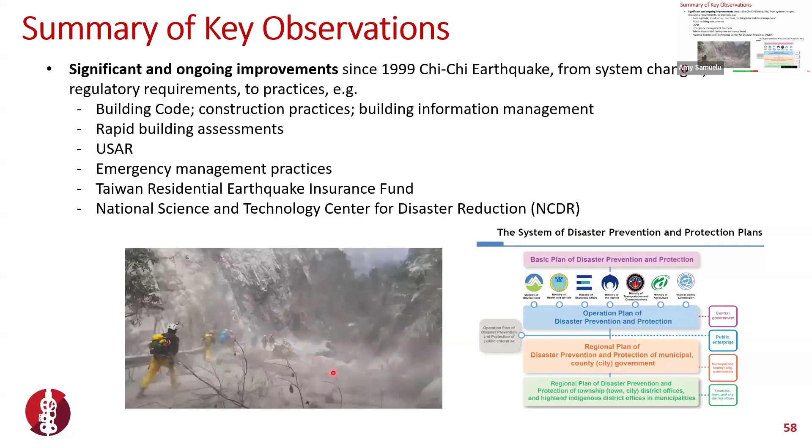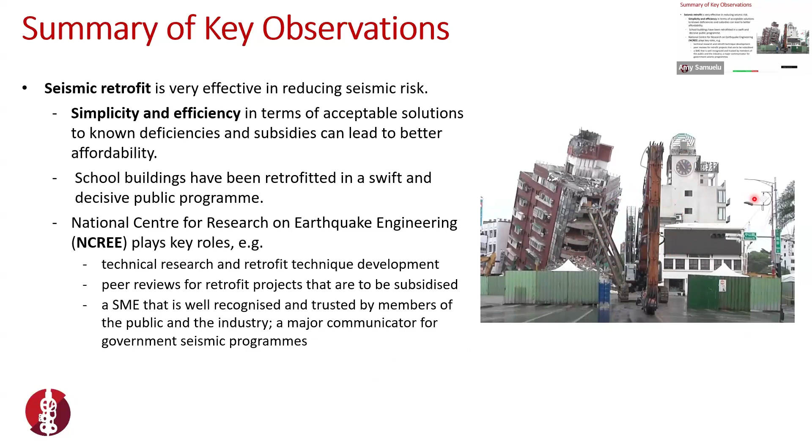You heard a lot about simple, pragmatic, efficient retrofit approach, and about technology. When we were in Taiwan, we were very impressed by the technology application. One of the team members asked, apart from GIS, what else do you use that we might be able to apply in New Zealand? The answer was that it's not just about technology, it's about integration, interagency collaboration. You've heard quite a bit about that, and also Doug and Julian both talked about the earthquake early warning system.

I'm going to play a short video to show that it's quite dramatic. If you are uncomfortable, then just shut your eyes.

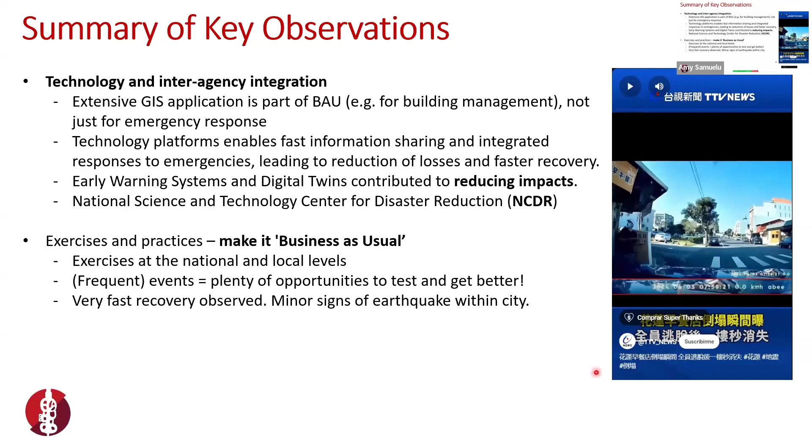So the shaking started, and you can see the counting of the seconds. How many people ran out of that place? And someone was trying to go into the building - luckily he didn't, the building collapsed. 10 seconds.

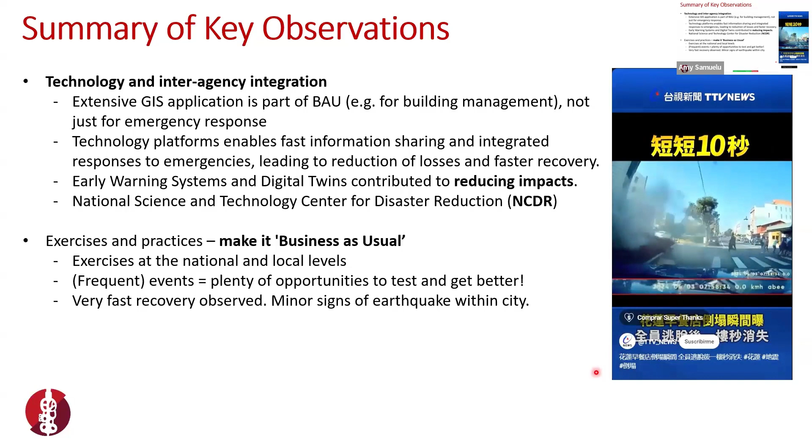About 20 people ran out of that place. There was a busy, popular breakfast place in Hualien City, and the earthquake happened at 7:58 in the morning. The place was really busy. The owner operator came out last, and she even remembered to shut the gates. That showed that the earthquake warning system does work.

Taiwan has so many earthquakes and typhoons all the time. For Taiwanese people, you have to do all this all the time. It's not just like something might happen one day - no, it happens all the time. So you have to treat this as business as usual. It's not an emergency one day, it's business as usual - just do it.

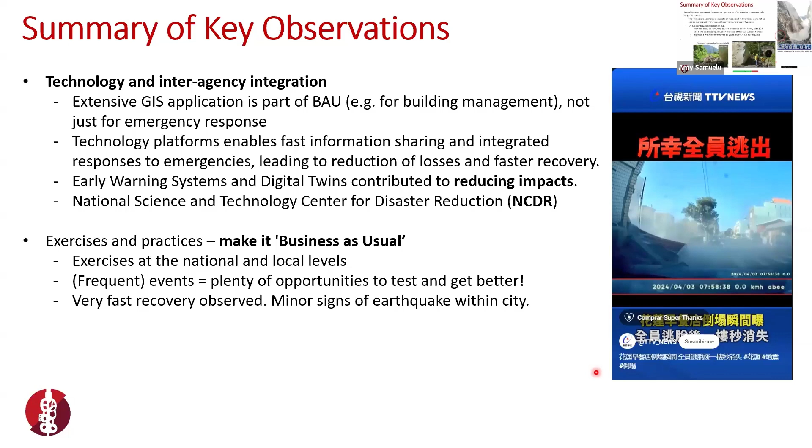We have also seen the damage after the Chi Chi earthquake, and the severe typhoon a couple of years after Chi Chi really had a worse impact on the whole of Taiwan. There are things that could happen to Taiwan or the Hualien area in the next few years.

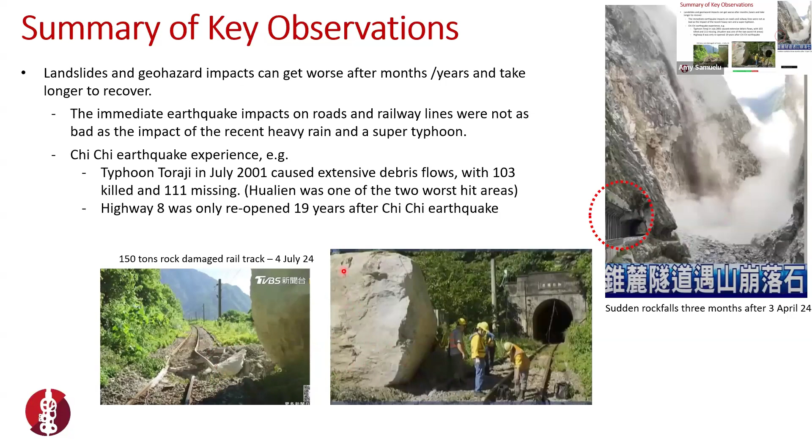One reason, as Doug mentioned earlier, is that Hualien has a lot of earthquakes and typhoons every year - the location gets hit by typhoons all the time. People in Hualien are very resilient, they are so familiar with this event. You get on with life, you know what to do in general.

Also, as Julia mentioned, the retrofit after the 2018 earthquake has helped and saved quite a few lives. The early warning system, as you've seen, actually does work and has saved quite a lot of lives. There is also good public awareness about the system - you heard that people complained when they didn't get the alert.

Exercises do work. In Taiwan, as mentioned, every September is their national exercise month. Two years ago, Hualien was chosen as the location for the national exercise, and more than 1,000 emergency responders participated. So they had the drill two years ago and that helped.